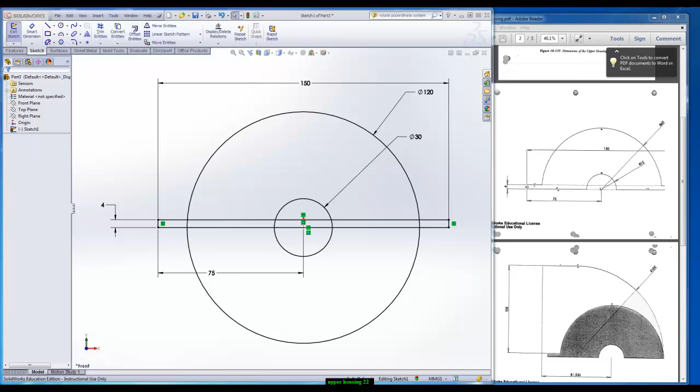This first sketch on this upper housing is in millimeters. Make sure that you are set to millimeters, grams, and seconds. I am creating a sketch in the front plane.

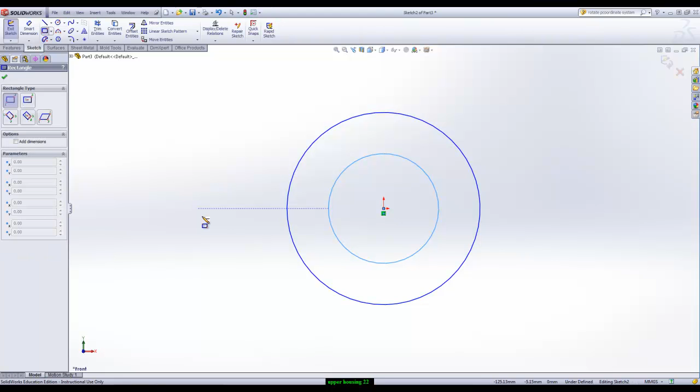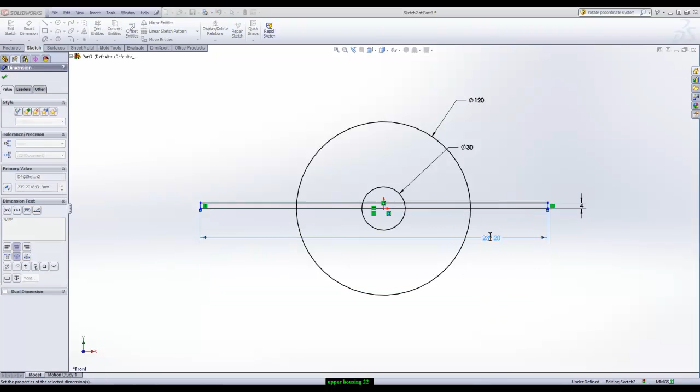I am going to create the two circles, and I'm going to create a rectangle. I'm going to make the rectangle coincident to the origin. Throw on the dimensions: 120 on the outside circle, 30 on the inside circle. The rectangle is 4 tall and 150 wide, and I put in the 75 to center it.

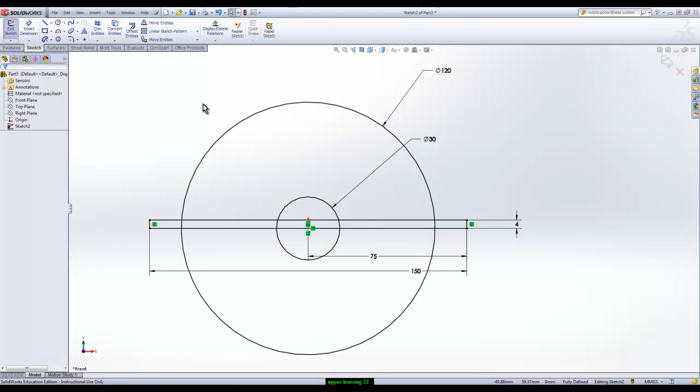So I'm doing the full pieces of geometry, the circles, the rectangle, dimension it, constrain it, and then trim it. Pretty cool. Sketch the whole thing with the circles and rectangles and then trim it. It's a lot easier than trying to draw each of the different features and get them lined up.

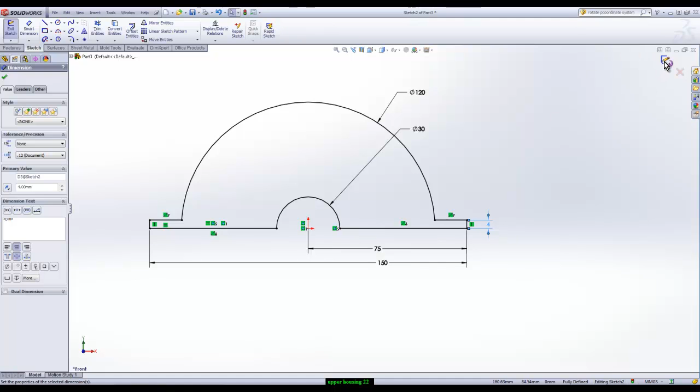This is going to get extruded, I believe, 80, mid-plane. Make sure it's mid-plane. So I'll show the sketch here. It's a mid-plane extrusion 80. Okay, so the first one that we did here is a mid-plane extrusion

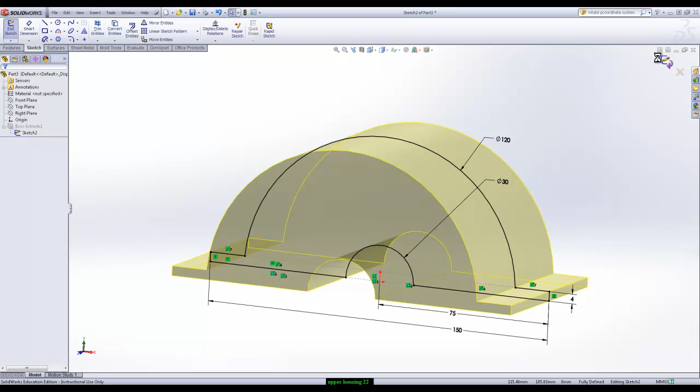80. I'm then going to go to another sketch, a sketch in the front plane. Look at that front plane, and I'm going to create a 3-point arc from this corner coming up, and what I'm doing is creating the path. So this line and arc, if you make them tangent, is my path.

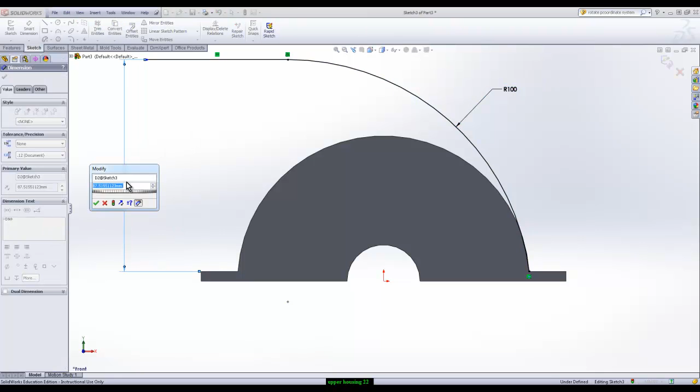The radius of the arc is 100. The distance from the line, make sure you get the top edge, not the bottom. Things will go wrong. From the line to the top edge, 100. And then from the center to the end of the line is 81.5.

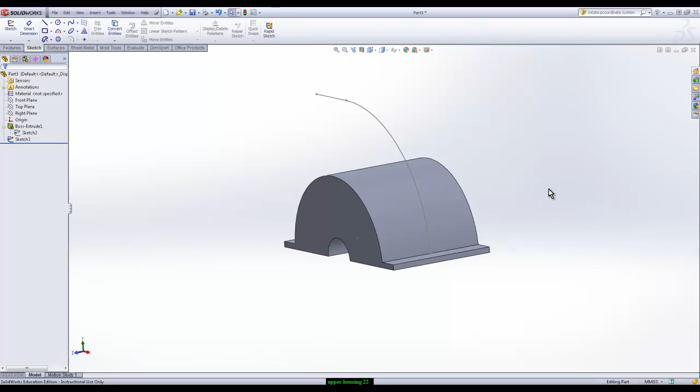That's just the path. It is in the middle because we did a mid-plane extrusion, and it's in the front plane. Now I need to make my profile up here at the end of this line. So this should be new to you, but in order to get that profile at the end of that line, I have to create a plane.

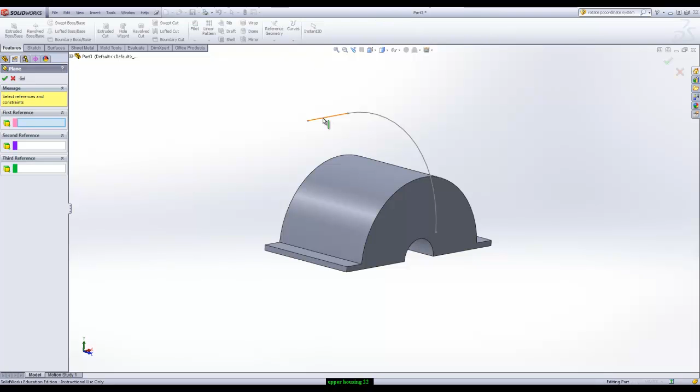So features, reference geometry, plane. If you select the line first, I don't think it really matters, line or endpoint. But if you pick the line and then the endpoint, it puts the work plane right, or sketch plane right on the end of the line. Select the line and the endpoint, and it'll make the plane perpendicular to the end through the endpoint that you select.

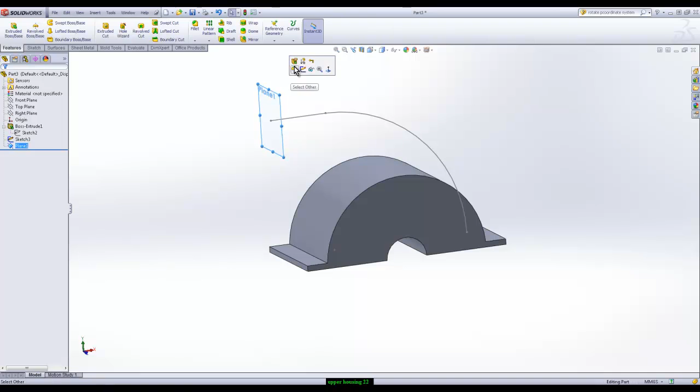And then you can make your sketch on that plane. I'm just going to make a rectangle. It's not touching the origin, I know that.

But if I right-click, choose midpoint, hold the control key down, and select the origin, I can make them coincident. So I can put the midpoint of the top of my rectangle on the origin. I did that by right-clicking, selecting midpoint, and then holding the control key down and picking the origin. So if you right-click on a line, you can select its midpoint, and then you can make that point connect to it, the origin. The size of this rectangle

42 by 57.5. Did I do that right? Yeah, I guess so. The fillet is what, 15? So I do it with a rectangle and then throw the fillet on there.

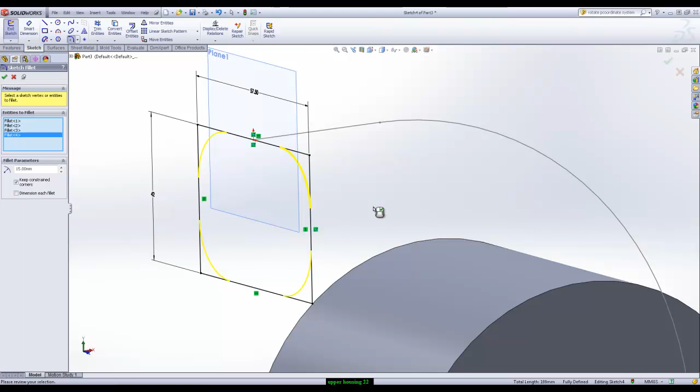Because I have that midpoint selected, when I pick that top line, it's going to give me a message. Because I selected that midpoint, it's just telling you that when you put the fillet on there, it's going to change the location of the midpoint. But as long as you put a fillet on both sides, then the midpoint shouldn't change.

So at this point, I've created a path and a profile. They are two different sketches. I had to put that plane on the end point of the line, and then within that plane I made my profile.

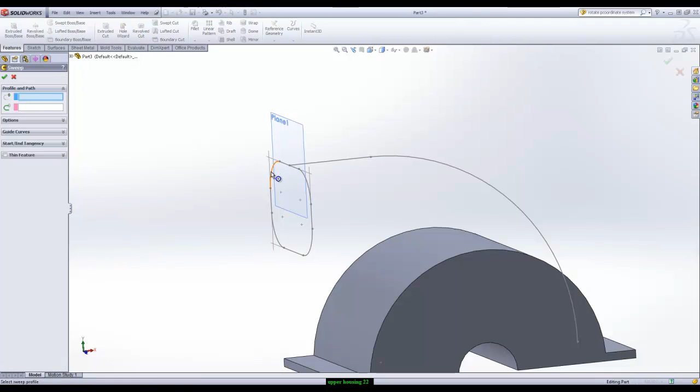With the two sketches, profile and path, I can now do a sweep. That sweep needs a profile, that's the second sketch I made, and a path, that was the first sketch I made, and I can sweep along a path.

The profile must be perpendicular to the path. Okay, and the profile does not have to touch the path, but it does have to be in the same plane as the endpoint. Did I explain that well enough? The profile doesn't have to touch the endpoint, but it does have to be in the same plane as the endpoint, perpendicular to it.

You can have it follow the path. It can be normal to the path. You can have it twist along the path. Maybe not that much. Maybe it'll fail if I do that. You should be able to have it twist along the path. So I got it twisting, just not very much. So you can have it twist along the path.

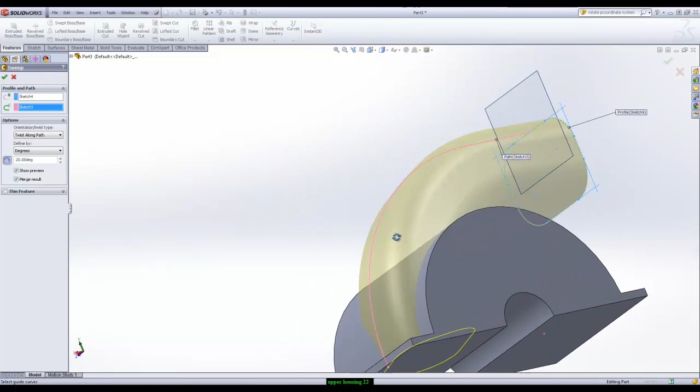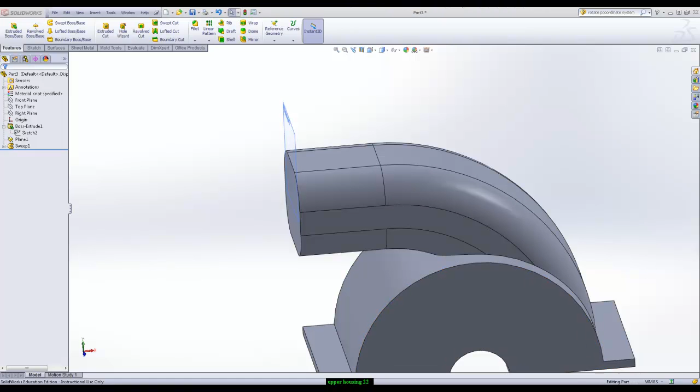We want to keep it just in its defaults. After I'm done, I'll show you what guide curves are. So I want to make those two sketches and make that sweep. They are here. That's the first sketch and the second sketch in the PDF. So let me do this first. I have another one here.

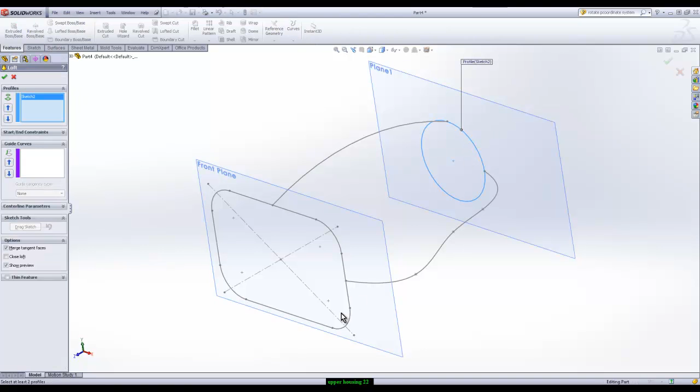If I go to loft, a loft is going to take two sketches. If I pick at a point on my right sketch and a point on my left sketch, I'll get it to loft between the two. Change shape from the circle to the rectangle. If you pick at opposite points in the loft, so say the top of the circle but the bottom of the other, you can get that loft to twist.

You pick at one point, say in the top of one sketch, but a different point, say in the bottom of the second sketch, then your loft will twist. If it does twist on you, you don't have to redo anything in this program. Go back in and fix it. Grab the little point, bring it over the grip point or the handle point on the loft, and pull it around so that the loft is straight.

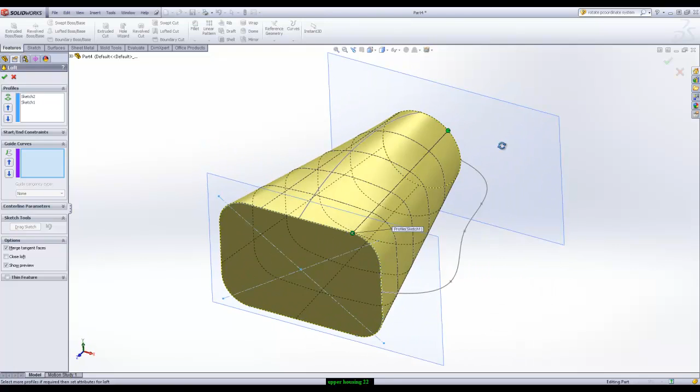To make you have less headaches, make sure that you pick at the top of each sketch, and then it won't twist on you. What are guide curves? Guide curves take this loft, but make that surface stretch out to the guide curve. So if you come down and pick in the guide curve box, you can get the loft to stretch out to that guide curve as it tries to make its way from one profile to the next.

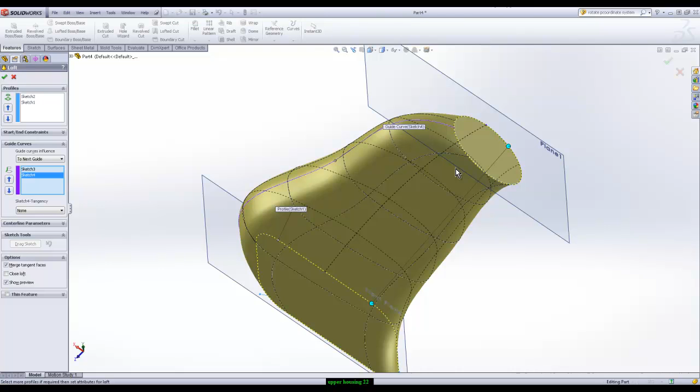So this exercise doesn't have guide curves in it, but I know it's there in the dialog box for that loft, and I want to make sure you understand what it is. One of the other exercises I've given you is going to take a guide curve. Let's go back to our part we're working on. And I need two sketches.

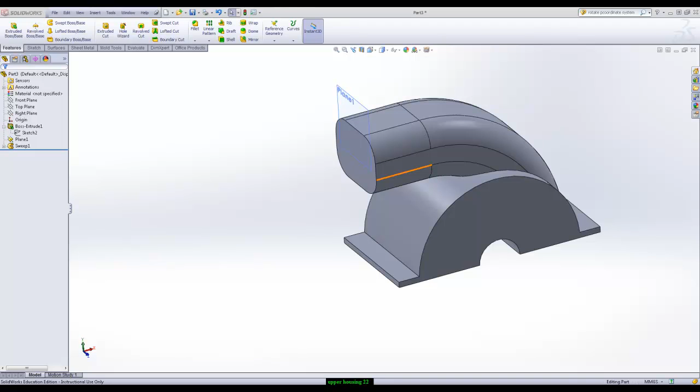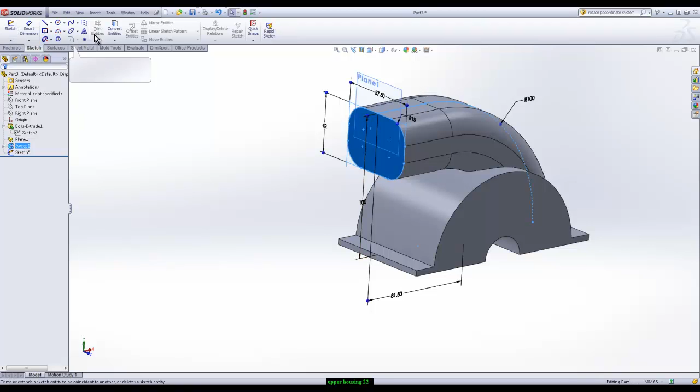So the first one is just on the face of what we already have. So I'm going to pick on the face, turn it into a sketch, and convert it. Done. That's my first sketch. Okay, so I just pick the face, sketch, convert, and it gives me those edges in a new sketch. That's the first profile of my loft.

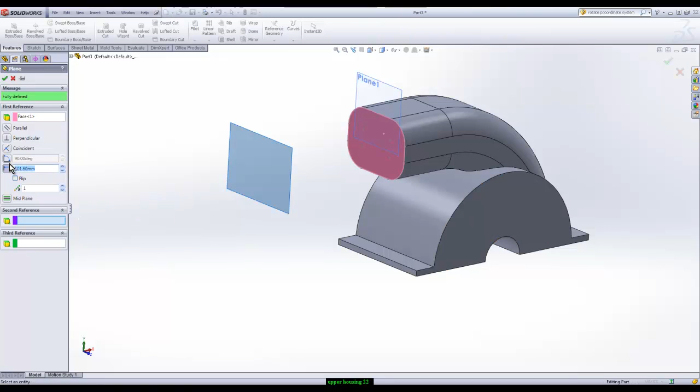I'm then going to offset a new plane, and I'm going to have to go back to the part to figure out the distance. It's 57.5. So I'm going to offset this out 57.5. That's where my second profile is going to go. I'm going to select the plane, sketch on that plane.

I need to connect the two together. If I was to change my original sweep, I want my loft to change too. So I'm going to take the top edge of my existing part and convert that into my new sketch. They are forever connected. If this top surface on this part is to move or change, then that line will move or change with it. Is that clear to everyone?

But I don't want that line to be a part of my model. So I change it to a construction line. Convert it in first, change it to a construction line. Then I can go ahead and make my rectangle. It's just a sketch. I drew it out here in space, away from everything.

And then I can connect maybe a center line coming up. Guys, maybe a center line coming up, so I know where that endpoint is. So I can connect again, just like I did on the last sketch. Right-click, midpoint, hold the Control key down, select the endpoint, make them coincident. So I've now connected my new sketch, my new rectangle's midpoint, to the original object.

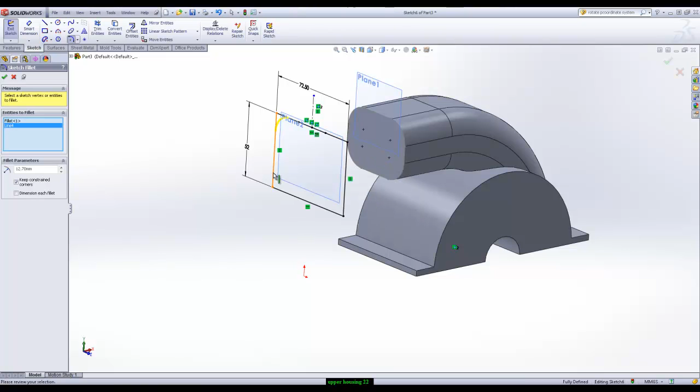Then go ahead and dimension it. And put the fillets on it. Just a warning, it's because I'm changing the midpoint again. As long as I do both sides, my midpoint stays in the same place. 2 sketches. It's very important that you connect this sketch to that top edge. Now that I have the 2 sketches, I can go do my loft.

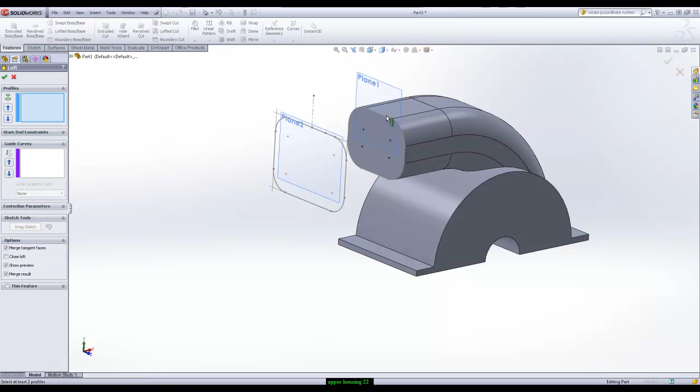Loft, if I pick this top edge and the side edge, twist. No big deal. Move it up, no more twists. You can change how it starts by changing the start and end constraints. You can change it from being perpendicular to being tangent just by changing, you can say a direction vector. You have to set a line. You can say normal to, which would make it tangent. A tangent to face.

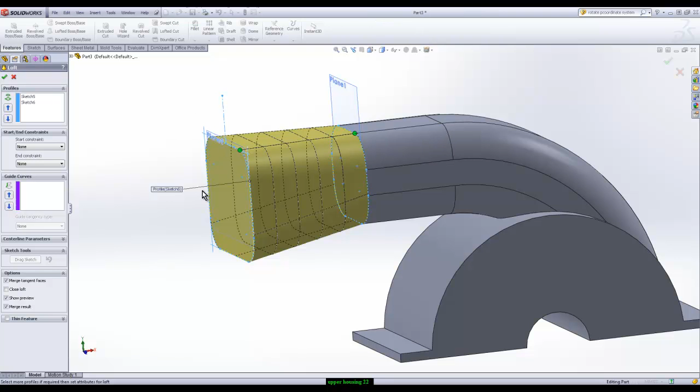Normal to is going to come 90 degrees off the profile. Tangent to face is going to make the faces tangent as they go from the original object into the loft. For this exercise, though, they're having you just leave it at none. I just wanted to show you those options. They're having it leave the end constraints at none, and there's no guide curves. Just loft between the two profiles. So that's an introduction to sweeping and lofting.

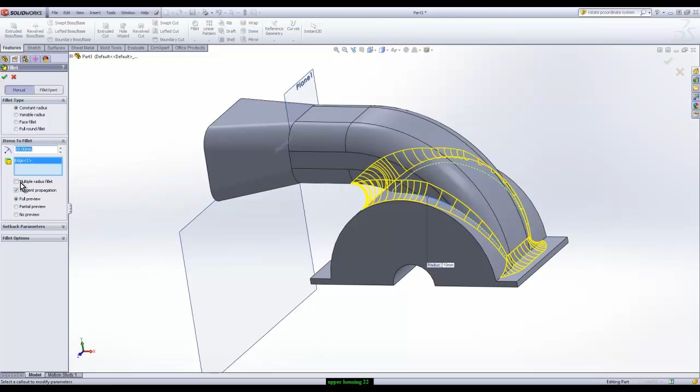The rest of this exercise, you're going to just come up to the drawing and add to it. One of those is the fillets. If you put in a fillet, a constant radius fillet, and pick on this edge, it goes all the way around. Wrong. Change it and turn off the tangent propagation, which is, in other words, it's finding the edges all the way around automatically for you. Instead of letting it find the edges, we will change the radius to 5 and just go pick on only the edges that we want.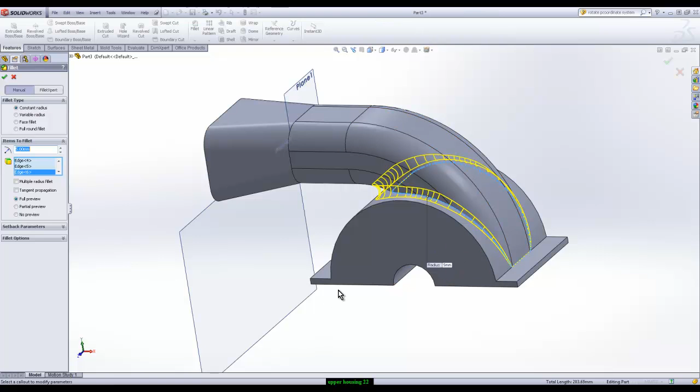So you're not going to pick on that bottom edge at the bottom flange, please. Do not fillet that. So don't let the program find it all the way around. Stop it by turning off tangent propagation and then go pick only the edges you want to have the fillet on. The other one at the top up here is, what is that, 5? Okay, so instead of doing the tangent within the loft, they're having you add the fillet on later.

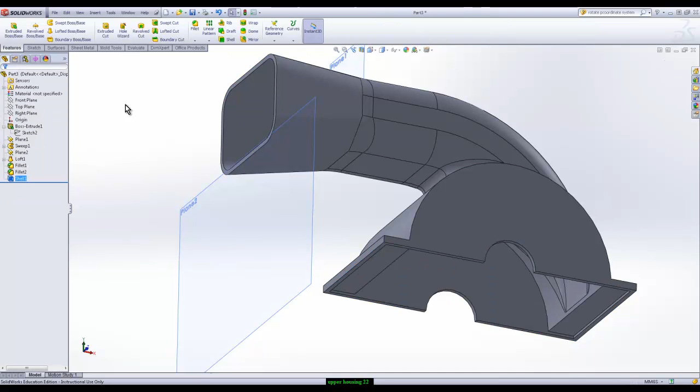The last part I'm going to show you is the shell to remove the opening and 1, 2, 3 on the bottom. That shell is 2.5. And then you have a nice hollow. You have a few more things to do to it. You're going to have to cut this front face out. You're going to have to add back in the material that disappeared down here on the bottom, and then you're going to have to put the holes in. Questions?